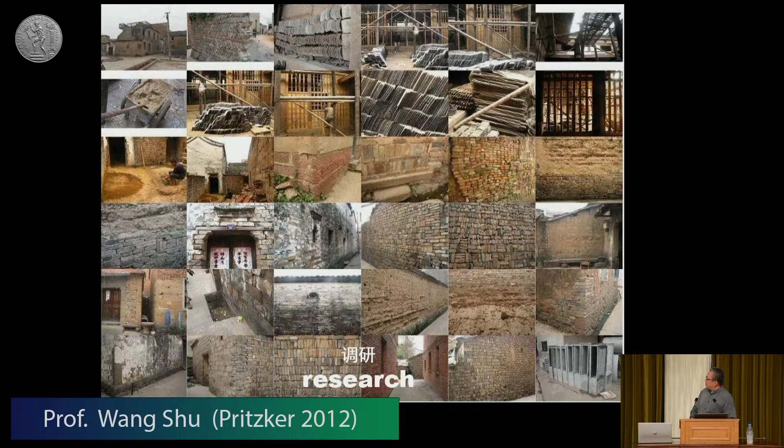It's our basic attitude. What we can do, we want to do something more active, more interesting. So we do a lot of research every year. We're also professors teaching in the architecture school, so we work with our students together, doing a lot of research every year.

If you have a chance to come to China, you'll find we have a rich tradition, architecture knowledge, especially in the countryside, because in the Chinese cities, traditional buildings are almost demolished. We worked very hard - you know, Chinese worked very hard. We used 30 years to demolish more than 90% of traditional buildings in China.

But now we want to think, can we also work very hard so our tradition can still live? Live doesn't just mean doing conservation, renovation. We want tradition to give a different way in new architecture creation.

So today I just want to talk about these topics through two new works. In the past 3 years, the whole world experienced the pandemic, and we couldn't go out of China, couldn't have any trip out of China. But for our studio, the good thing is we had more time to do something in our local work.

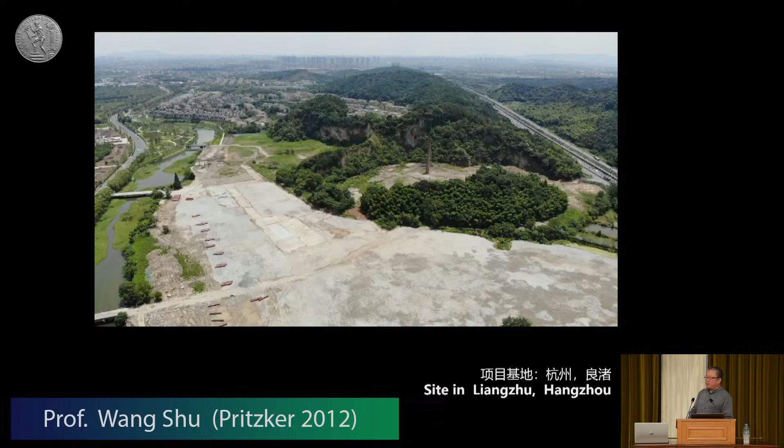The site looks like this.

Another background is this project is in a special area. Very near our site is a place with ancient cities. When we did the design, we started in 2019. In that year, this ancient city, in fact, had nothing there - it was just something underground, and it became a UNESCO heritage project. So this is our second limit: you should not do large-scale new buildings very near the UNESCO heritage project.

In fact, architects like us, when we think about a project, we think about a lot of things, especially the background of this city. It doesn't just mean this small site.

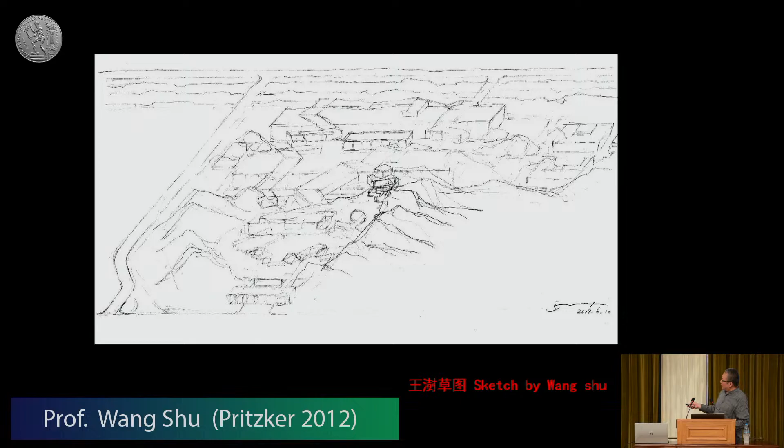This is about the height. 15 meters height, I control the main building maybe 12 meters high, and above this, you have a little bit go up, go down, similar to a mountain stage, like this. This is basic thinking. You can find the different layers of the building, very near the site peaks and mountains, and they penetrate from a different layer, gradually going in. That's the basic idea.

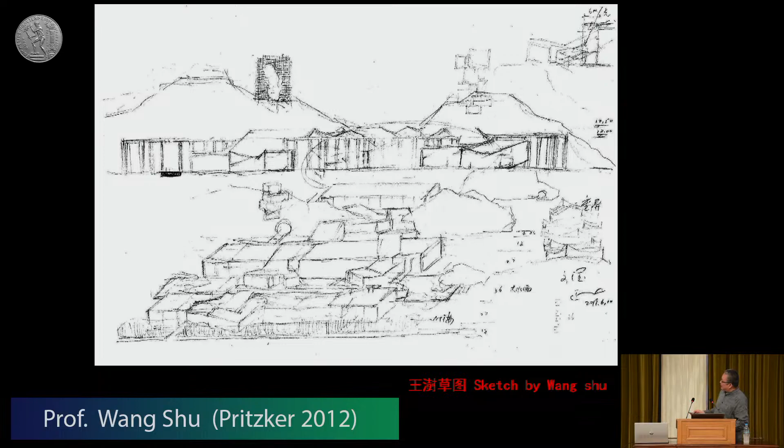This is the master plan. We have the hill here, a little bit of hill here, and another small hill here, like this. Finally, I made a basic decision in the master plan: this part has something more similar to our gardens. They have a water pond, and the basic system is composed of 3 water ponds - the south water pond, middle water pond, and the north water pond.

Then the different layers of buildings are arranged like this, in a very simple way. But I hope with the real experience of the real building, finally you will find it's not so simple.

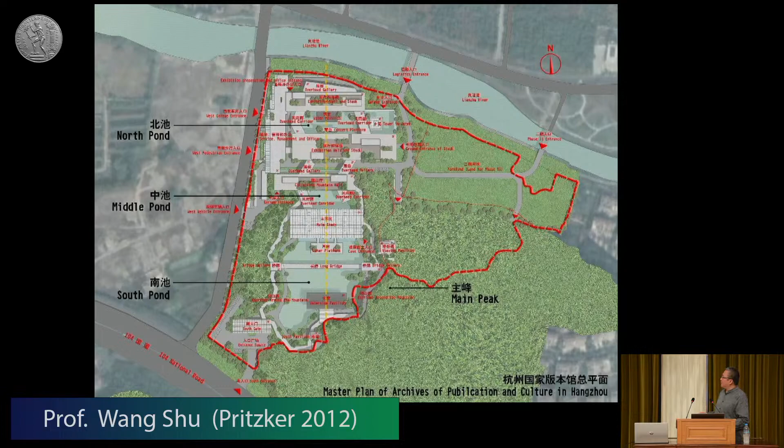The building was finished like this, very similar to my very beginning master plan. It's not very easy for a national cultural building - you use this, for Chinese, it's maybe too modest a way. We spent a lot of time talking with our client, the government client, and finally they accepted this idea.

We are very lucky. The best feeling about Chinese architecture, especially in tradition like this - what is the feeling? You can see this is the main buildings, and this is the hills. When people come directly from here, when you come to here, you will find the building becomes part of the nature.

When you get to the entrance, it's the gate. You can find the spatial screen, and penetrating this building, you can see the natural hills just behind. This is the entrance gate. When you go in the entrance gate, you will find the space like that.

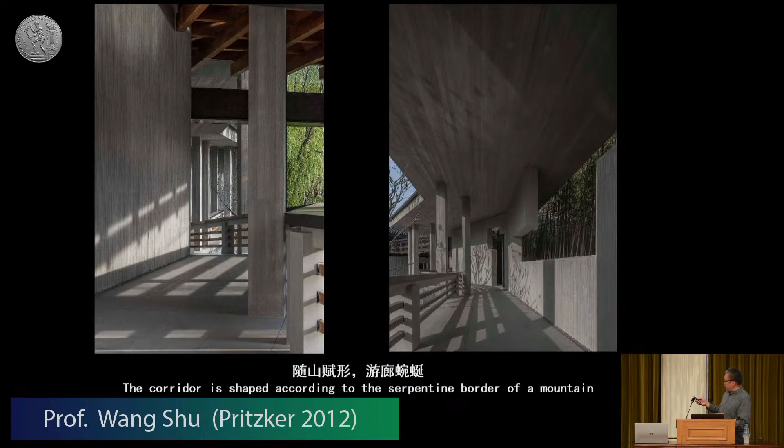You will find the very spatial corridor very near the hills. The basic type of the corridor is very similar to the natural boundary of the hills, like this. And as you go into the corridor, you will find they have very rich change. For these angles, you will find they have many different layers.

This is the park - this library and the book storage, and the gardens totally mixed together.

The weather is very hot. Basically, you can get the feeling the weather is very hot, so the building has almost no wall you can find, because it's too hot. So they need the wind to penetrate the buildings. When people usually talk about Chinese architecture, they talk about feng shui. The basic feng shui means wind and water, right? Because in a very hot place, we need the wind.

So how can the wind penetrate the buildings, and how can we use the water to control the temperature, giving people more pleasure, a more peaceful feeling. So water, wind, trees - they are all very important elements in architecture design. Architecture is not just the solid part of architecture; it means you should give some way that people can live pleasurably in this spatial situation.

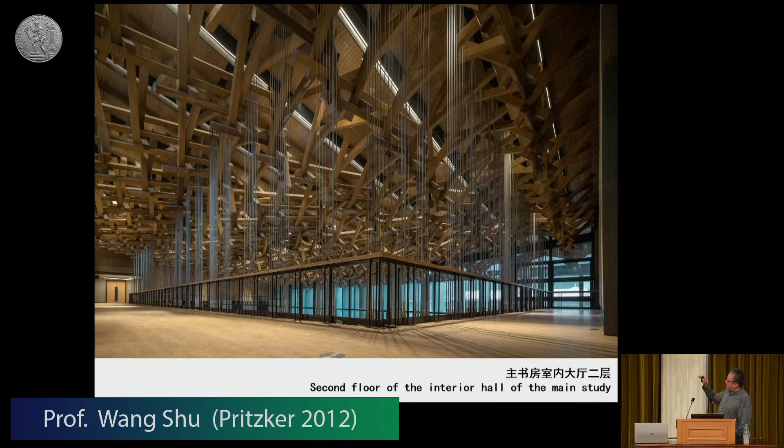On the second floor, you can see the structure like this. You get a little bit of feeling from Chinese tradition, but in fact it's a totally new way. You can see the second layer of the building like this.

We have these small hills. We used a special way, like the building, to protect the hills. So now finally the hills become part of the building, right here. It's similar to something in a Chinese traditional garden, but the way is totally new.

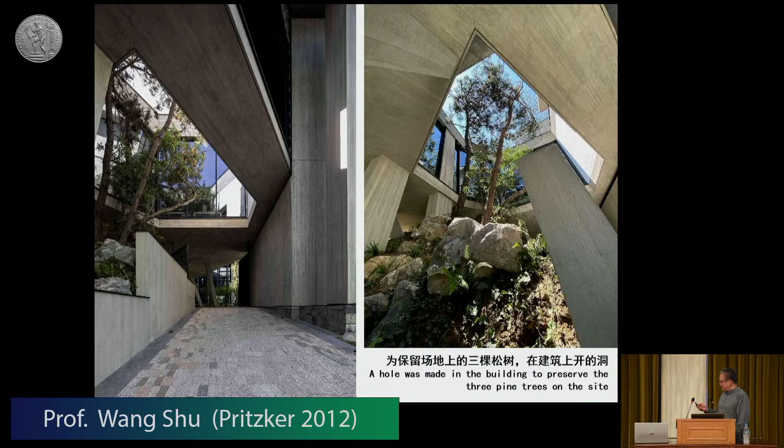Now gradually you go deeper into the building. In fact, this building is a special library. In Chinese tradition, the library is more similar to a store for books, especially important different editions from history. So usually public people don't have the chance to visit the building. It just means when it's finished, it will be closed, and we store the books inside. But we changed the basic way about the building like this.

We designed an exhibition system. You will find a corridor like this that penetrates the building from the beginning, goes around, and comes back. This is a very new system. Like the public, people can penetrate all these buildings.

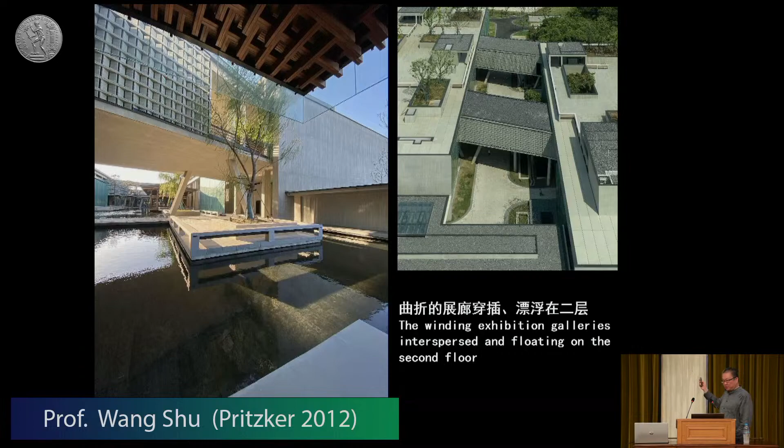This is the inside space of this exhibition system. It's the north pond — we have three ponds, south, middle, north. When you go deeper into the buildings, you find the north pond like this. It's another Chinese tradition: usually the writers, painters, poets, and country people would have a special party in a building like this.

You'll find this exhibition corridor penetrating the building, and we designed a special system about the columns. This column sometimes gives root space, sometimes goes around the trees, sometimes goes around a mountain corner. So finally we designed this system so it can most easily suit the natural situation.

Another way is the dialogue between materials. In this corner you'll find a concrete building here, a ceramic screen here, and a rammed earth building here. So the best feeling is that it's not just one building — it's more similar to a garden, or a small city. They have so many different buildings put together. It doesn't just mean one building.

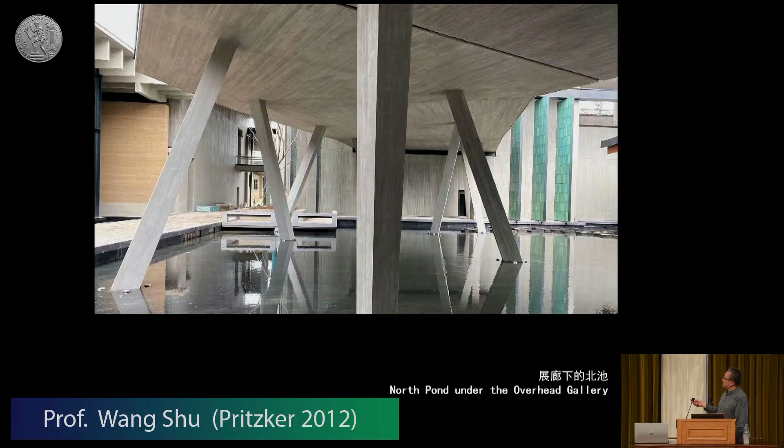Usually if you are a typical modern architect, for example, you use one material, concrete, from beginning to end — totally you use concrete as the material. But our philosophy is different. We prefer the feeling of variety. Variety means that in this world, different things have the right to coexist together. So this is the best feeling, the best philosophy. Here we have concrete, ceramic, wood structure — they totally mix together.

We also have a very special pavilion in the corner of the building, like this. The whole structure is wood. We used wood with glass and ceramic together to build this small, very special tower. It's a small, special exhibition space.

In fact, when the building was finished, people thought, oh, it's so beautiful. Even common workers thought it was so beautiful — more beautiful than the Apple Store. I think that's a good thing. Through this construction, this way, people get some confidence about their country.

The problem is when this small pavilion was finished, the client had a different feeling. They thought, oh, this glass building — how can you do an exhibition here? Usually the exhibition space is a black box, but this exhibition space is all glass on every side. When people come here, it's all landscape around you.

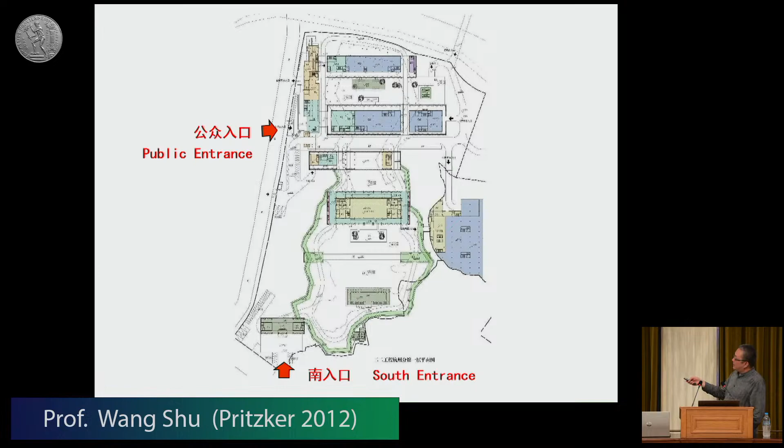This facade is very important because it directly refers to the UNESCO heritage, about the ancient city that totally used earth construction 5,000 years ago. So we designed this special facade using earth materials, earth construction. Ramparts, yeah, ramparts, like this. We designed this special rectangular roof system.

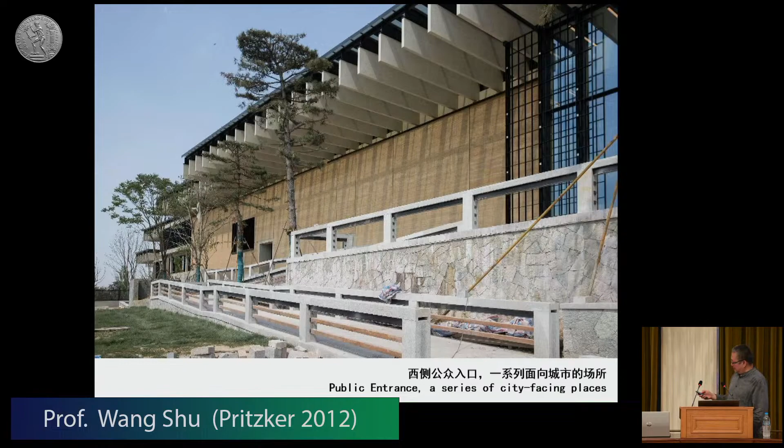Under the system, people can sit here to drink coffee or tea. This is the entrance. You will find, in fact, the building is big, not so small. And this is the ramparts wall.

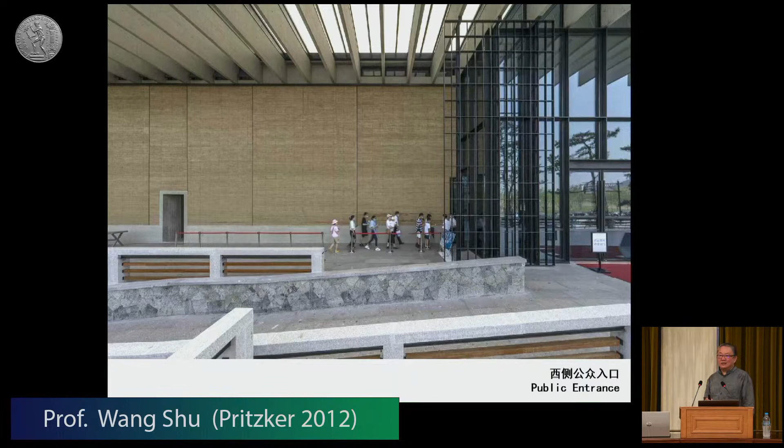Our studio started this approach about the ramparts system more than 10 years ago, and we built a lab in our architecture school to research the techniques and skills. In this construction, we don't just do the design, and we don't just do the construction design — we also give training to the workers on how to do the rampart construction. Our lab can do that.

This is the entrance, the public entrance. And when the building is finished, at night, it looks like this.

The first word we talk about is city works. In China, cities have very fast, large-scale development. But at the same time, China is very special — the countryside is a totally different system. There's almost no chance for architects to work in the countryside; there, all buildings are built by the farmers themselves. It's a totally different system. So we're interested in working in the countryside, because I think for a culture to be complete, it needs two parts: city and countryside. So we don't just want to work in the cities, we also want to do something in the countryside.

There's another small city in the south of our province called Quzhou. It has a population of 500,000 — in China, that means very small. The city is also now building more and more high-rise buildings. This is a very small quarter. But our studio's thinking is that vision — this kind of development — maybe isn't the only direction. We wanted to do a new approach to show people what a different way could mean.

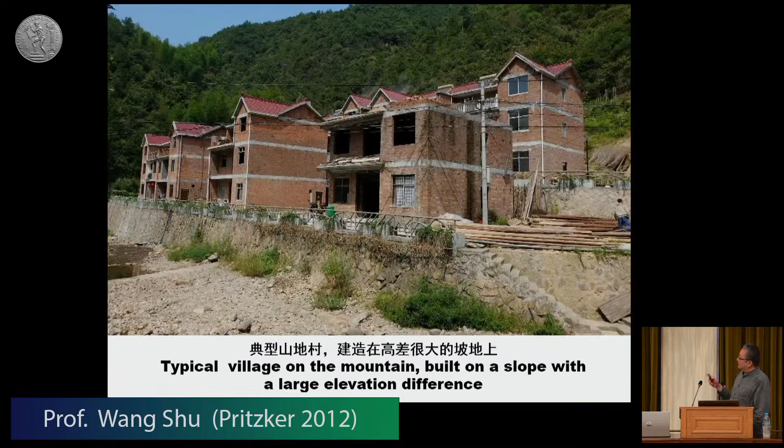It's very typical things, all over China, especially in our province. The government gives some new urban planning for the village. They demolish the traditional village, then they rebuild this. Usually people call this an American big house. Every family wants to go in this American big house like this. So they totally forget their tradition. Earth, material, bamboo, wood, totally be forgot.

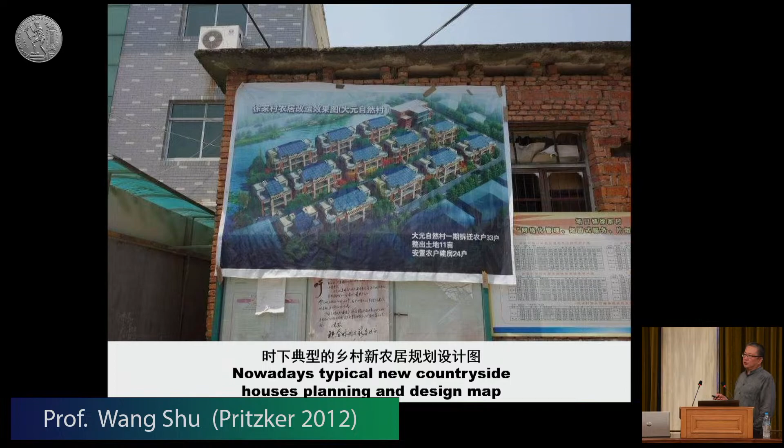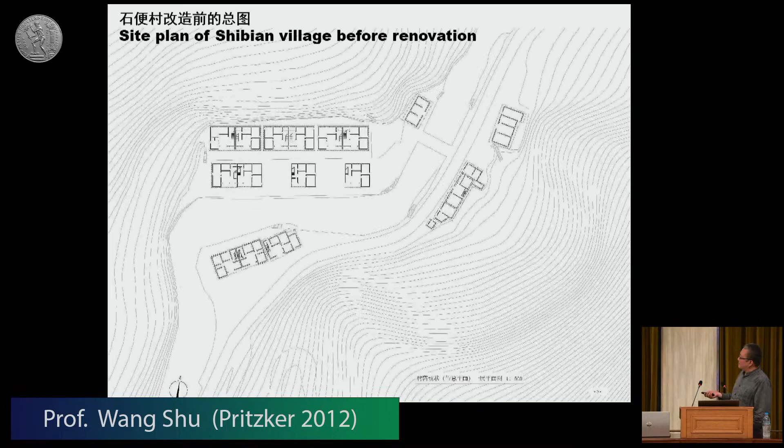So we do something like the intervention. The small village like this, that's the plan. And we talk to the people, the village people. Some people like our design, some people don't like. For example, these three families, they don't like. Our basic strategy is if you don't like, we will don't do anything.

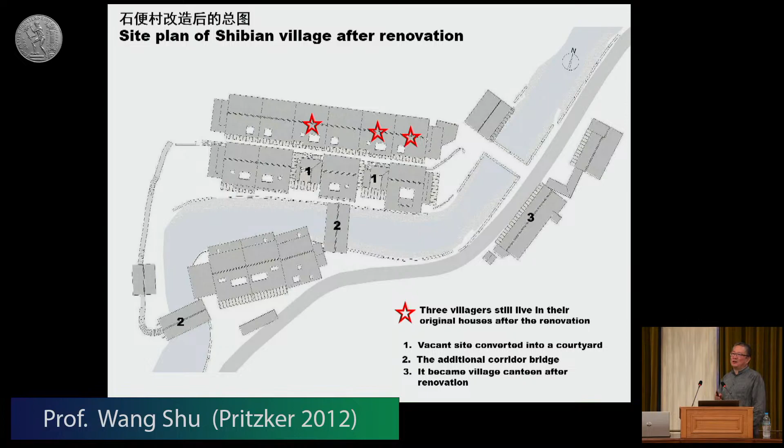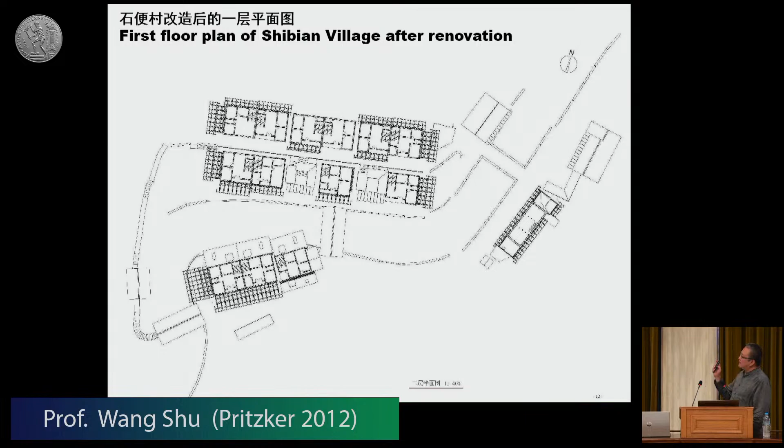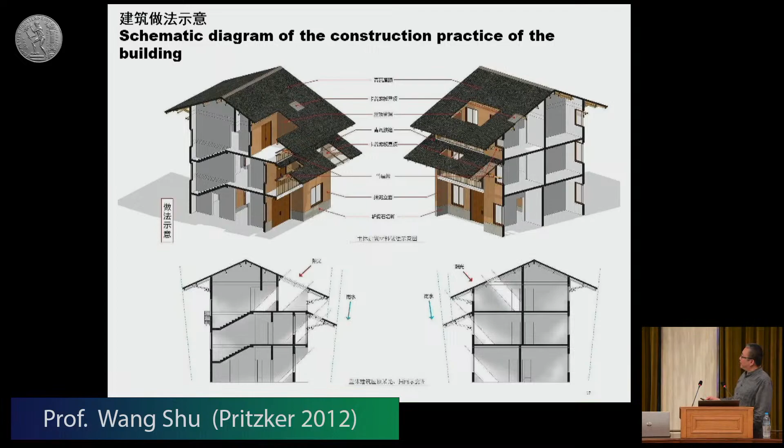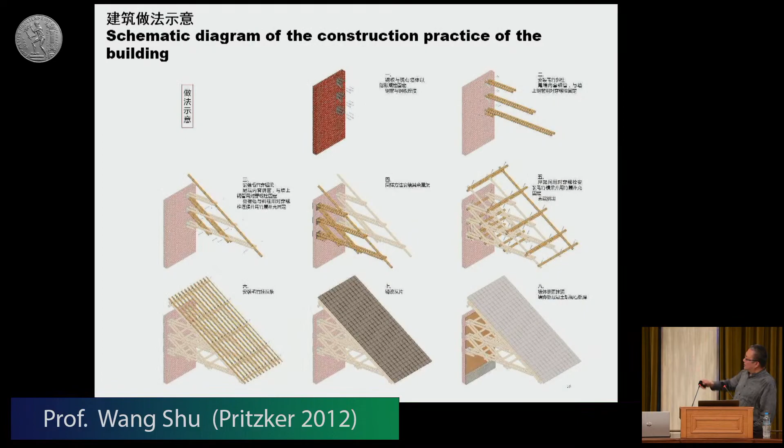In fact, we keep original building no change, but we just design something around the buildings. It's a hill side, so they have different height location. We designed the system because here is a lot of raining. In the summer, it's very hot. So we designed the system about raining, about hot, about the wind can penetrate the building. We designed this simple system, use the bamboo materials to give a more large roof.

This is our drawing, models drawing. Original like this. And they have a flood, a very big flood, and like this. But finally, a very difficult process. But finally, we finish in the pandemic time. We finished this project.

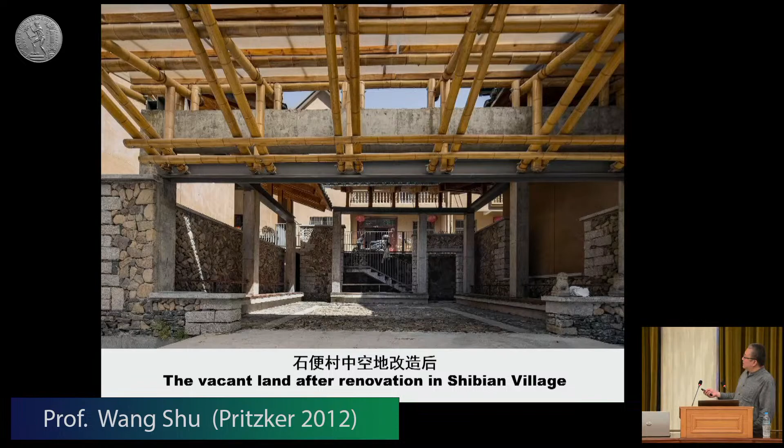You'll find this position. Originally, have building here is be taken down by flood. This before, this after. We give the new entrance for the village. Originally like this, we give the new public space like this. And people can sit here talking to each other. They have the roof system for the raining and the hot sunshine.

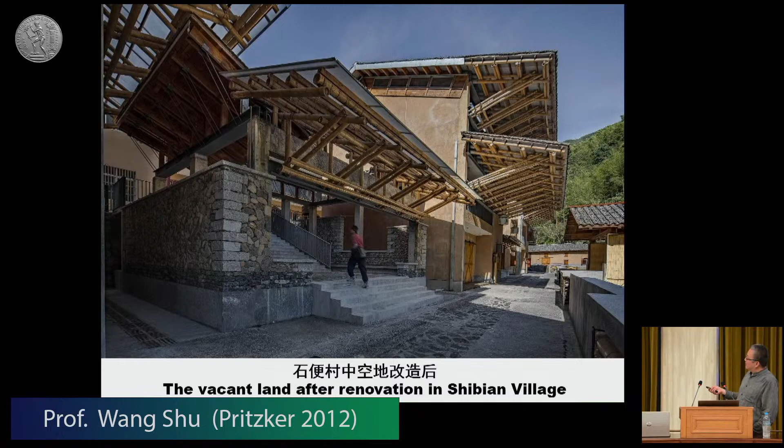Through the change, you can find what's meaning about architecture power. Architects really can do something.

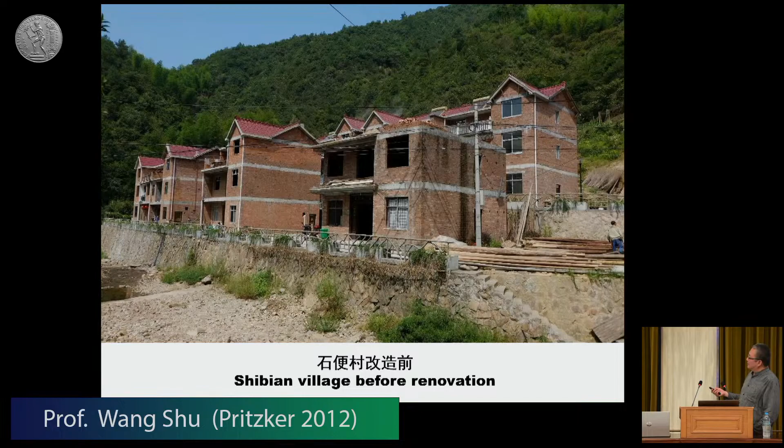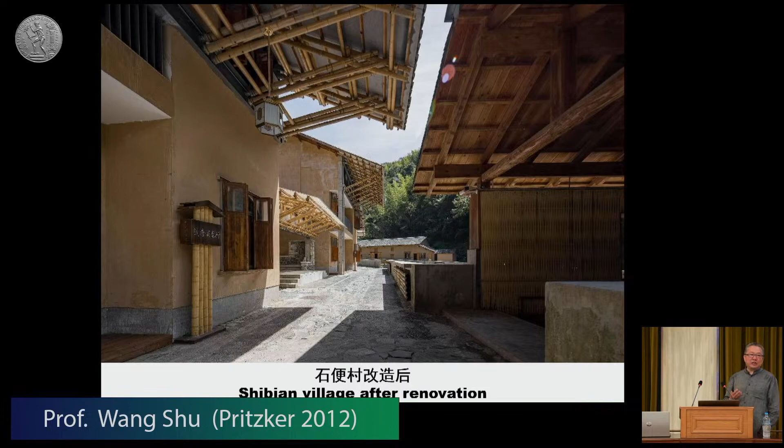This is the dining room for the village people. Now they can give the service to the tourists. The dining room not just for the village people, they're also for tourists. Thanks.

Maybe we should ask the audience if they have any questions. Yeah, definitely, I'm sure they have questions because China is a different context compared to Greece. Please come, oh, please come to here.

So I totally understand your work, being in China for many years, and I think there are some very important issues here that you are dealing with, and having witnessed your work before and now developing, I can see that. Okay, sorry, so I've witnessed the development of your work, and I think there are some very strong patterns. So I can see you're trying to revive the Chinese architecture, a quest for the real Chinese architecture. After all this, what happened with this invasion of the international style in China, and all the buildings that were demolished. I know that thousands of houses were razed to the ground in view of progress and the international style that went everywhere, the modern city, the functional city. But while this was good in some senses, on the other side, the heart of the Chinese architecture started to fade. And I know that in China, landscape is not part of the architecture, but the other way around. Architecture in China is really part of the landscape, is a complement to the landscape rather than new objects in the landscape. And I can see that in your work before and now, and developing. And I think you find your way towards Chinese architecture through material, through tradition, and through an understanding of architecture, a traditional understanding of architecture, which is actually through nature and through the interpretation of nature going through art.